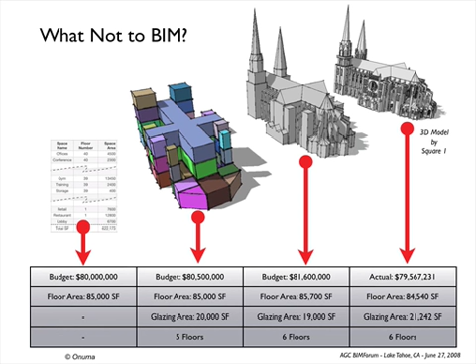In the Boston BIMStorm, for 90 minutes we interacted with the audience members who submitted their projects through iPhones and also on paper and pencil, forms that were filled out and passed to the front of the room, and over 130 buildings were created in this 90-minute period during the presentation.

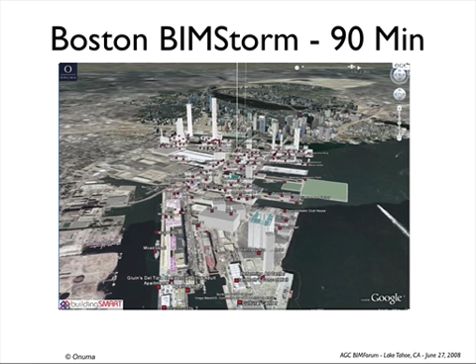The Onuma planning system is a model server that allows interaction with data in real time through the web, allowing different levels of users to interact, all the way from just using Excel or attaching comments, to other users being able to go into more levels of detail, from the interior of a space to the urban planning scale, and then attaching attributes and comments to the models, both at the building level, the room level, and the object level.

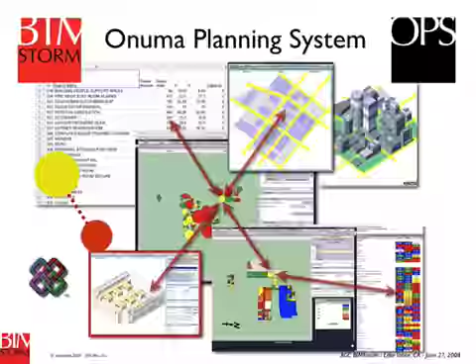Another very important concept is that we're using GIS, or Geographic Information System, standards to be able to locate multiple buildings and manage the local coordinate systems of BIM and the world coordinate systems of GIS, and to be able to look at buildings in the context of the BIMStorm with hundreds of different users involved.

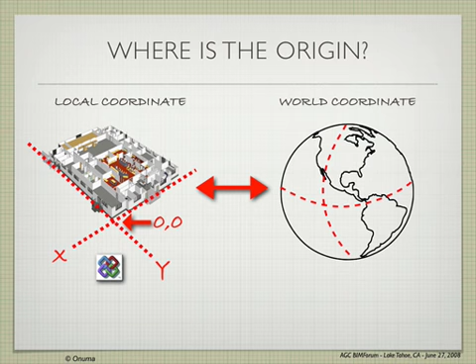In the Los Angeles BIMStorm, we had a 24-hour BIMStorm process for 11 countries and over 130 players, which created 420 buildings, 54 million square feet. We didn't print 2.8 million pages of documents, but that was the equivalent output, and it was 0 miles traveled. Everyone collaborated virtually. We did not assemble in one location.

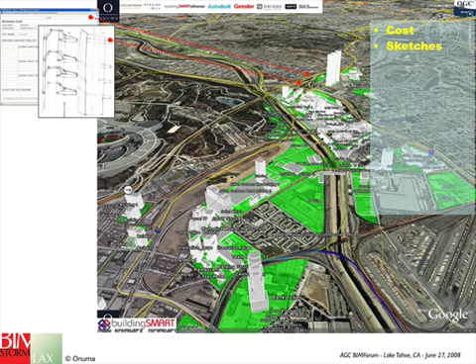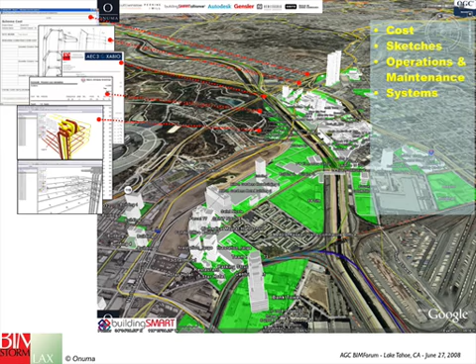This is the result of the Los Angeles BIMStorm, viewed in Google Earth. Different users interacted, all the way from hand sketches to cost estimating to life cycle analysis to energy and mechanical systems being designed from users around the world, collaborating in real time, looking at green roofs, looking at energy studies on the projects, and more detailed structural analysis on several of the buildings, and even the interiors of operating rooms on some of the projects.

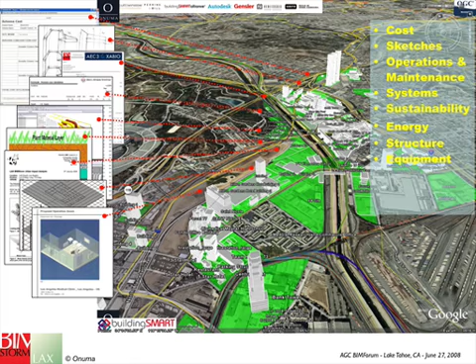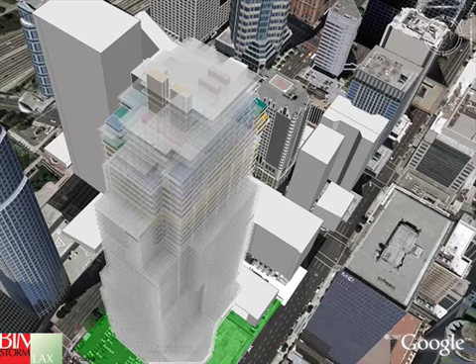This is one of the results of that BIMStorm: a 52-story tower in Los Angeles, looking at the view in Google Earth. The results of this design were output in IFC and then imported into a desktop BIM application, in this case Revit Structure, and a team in Hawaii and Manila continued the design in the 24-hour period and completed a first version of the tower.

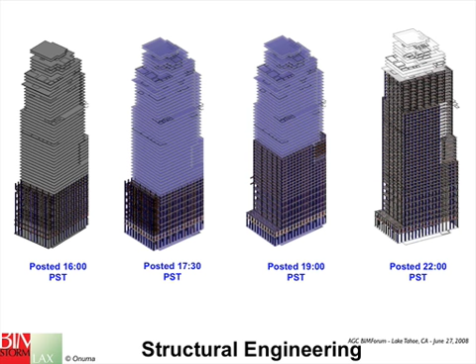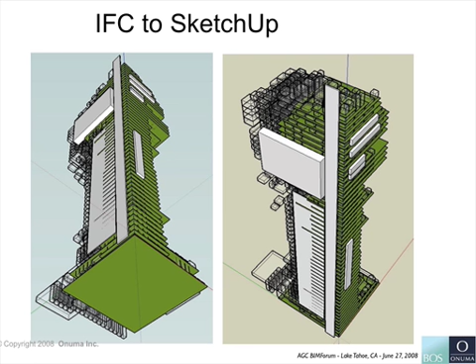The same model then took the data out through IFC to SketchUp to do some initial design studies. This is what the model looks like on the initial import from Excel, defining 52 stories and over 300 spaces in this tower. The same model is also shown in Revit.

In the 24-hour period, a lot of things happened. A lot of tools were used. A lot of different teams were viewing the models and the projects from their perspective and collaborating in real time, to demonstrate that through open standard exchanges, and even other exchanges if the open standard does not exist, it's possible to collaborate in ways that are unimagined in the current process of the industry.

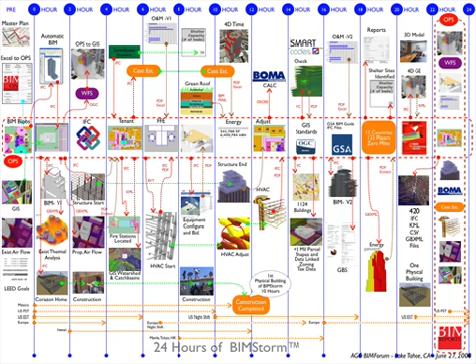A lot of tools were used, all the way from desktop BIM applications and engineering applications to Google Earth to Excel to 4D simulation in Google Earth and other tools. A lot of other 3D tools were also used, as well as energy simulations such as Ecotect and Green Building Studio. Whitestone Research, for example, did an operations and maintenance cost analysis for 20 years. Reports were generated, and a model server was used to manage all the information and support collaboration between the teams.

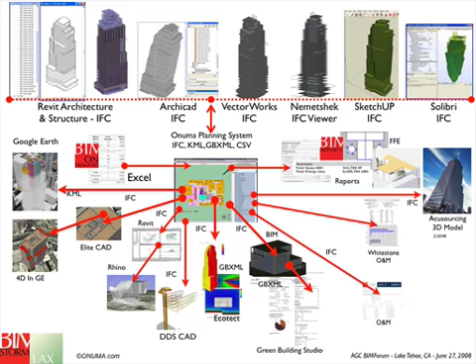This was repeated in June in London. This is a view of all 12 teams' projects on the same site at the same time. Each team had a different approach to the projects, using the model server and collaborating using IFCs. They were able to take projects, continue the design, and submit them in a 48-hour BIMStorm.

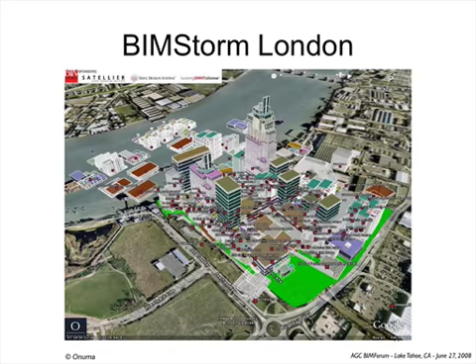The same was repeated in Vancouver in a 90-minute session to demonstrate how the same buildings from London could be moved to Vancouver and visualized there.